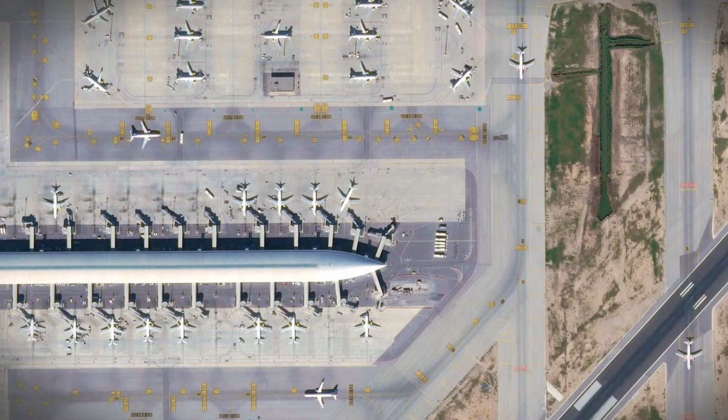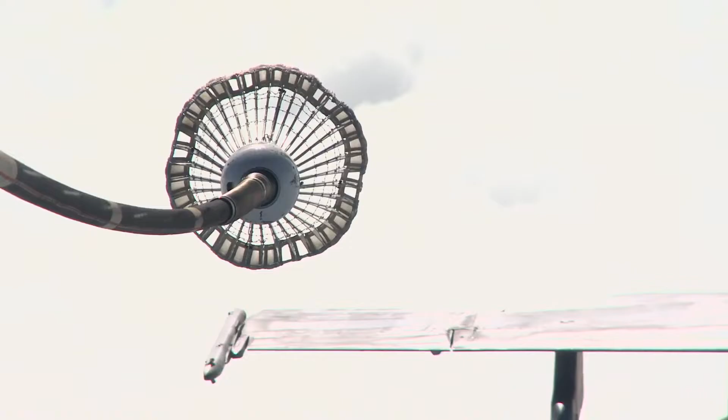The fuel mass carried by a commercial aircraft can represent about half of its total mass at takeoff. Carrying and pumping this large amount of fuel, in addition to safety regulations, requires complex systems which must ensure uninterrupted fuel flow during flight.

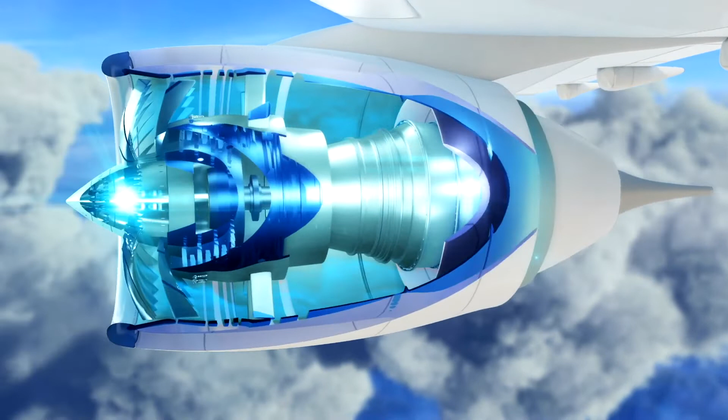Predicting the fuel system's behavior early in the development cycle enables you to optimize the key performance indicators for different attributes, such as fuel distribution and refueling, tank inerting, and coupling with vehicle dynamics.

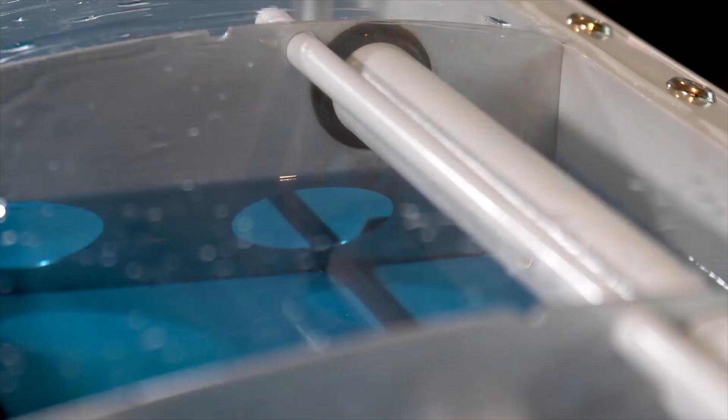This mock-up is a replica of a fuel system in an aircraft wing. It is composed of 3 tanks, separated by ribs, vents, and drain holes, as well as flap valves, and features a balance pipe and vent pipe.

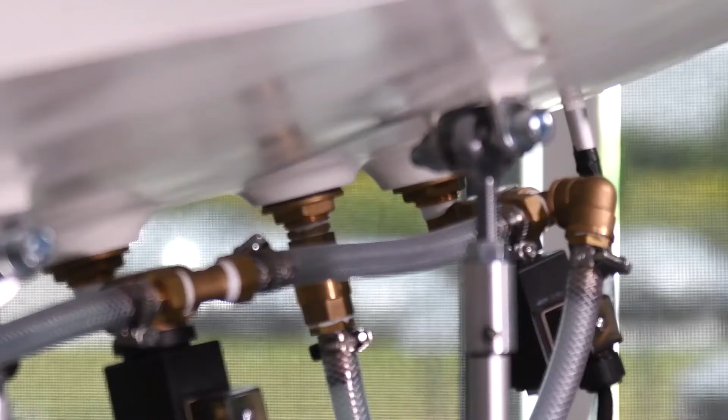To simulate the aircraft's pitch and roll, there are 2 electromechanical actuators. Finally, you find sensors which give information about the fuel rig operation, such as the liquid level in the outboard tank.

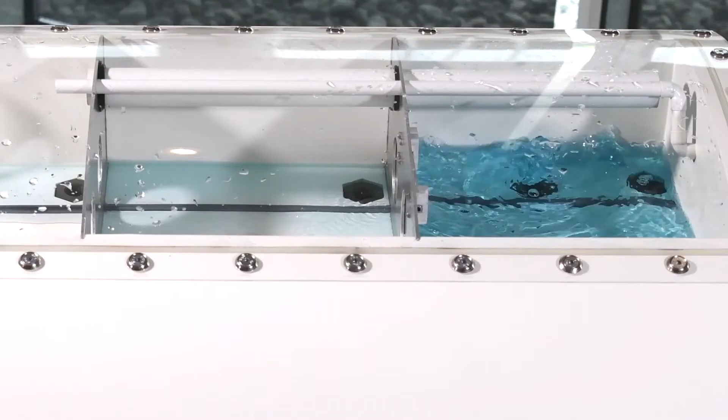This fuel rig has been made using Simcenter solutions for subsystems and component sizing, as well as architecture trade-off. With Simcenter Amesim, we run multi-domain simulations early in the development process, which allows us to validate the concept against the initial requirements. In parallel, we size the actuators so that they can cover the desired pitch and roll amplitudes.

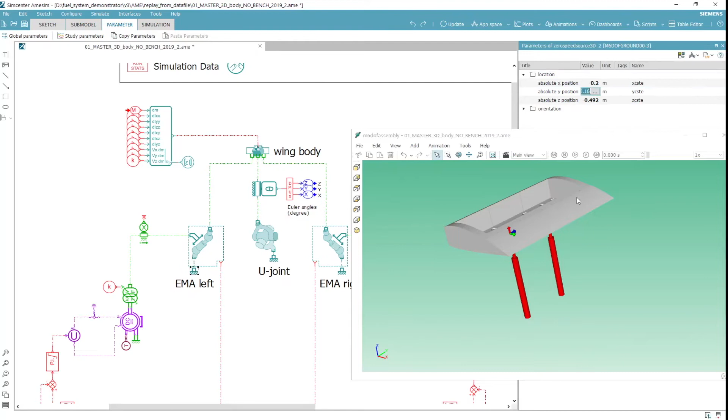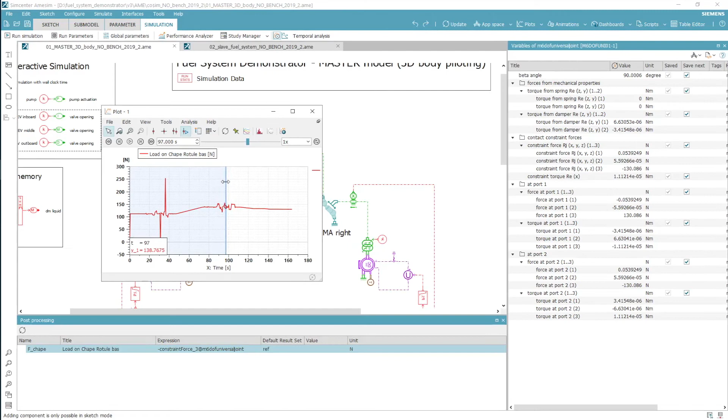Secondly, we build a complete CAD model in Simcenter NX based on the early system simulation results. When required, we can zoom in on the component level. For instance, we can apply the actuation loads extracted from Simcenter Amesim to a finite element analysis model of a mechanical part within Simcenter 3D to find the best compromise between actuation speed and structure durability.

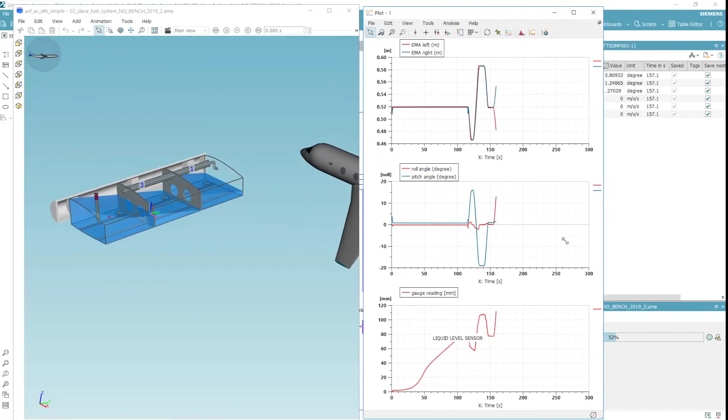In parallel, the controller is modeled and simulated, making the final integration and calibration straightforward. At the end of this process, we have a complete digital twin of the operating demonstrator in Simcenter Amesim. On the one hand, it co-simulates the mechanical parts and the actuators in 3D, and on the other, it performs all the hydraulic calculations.

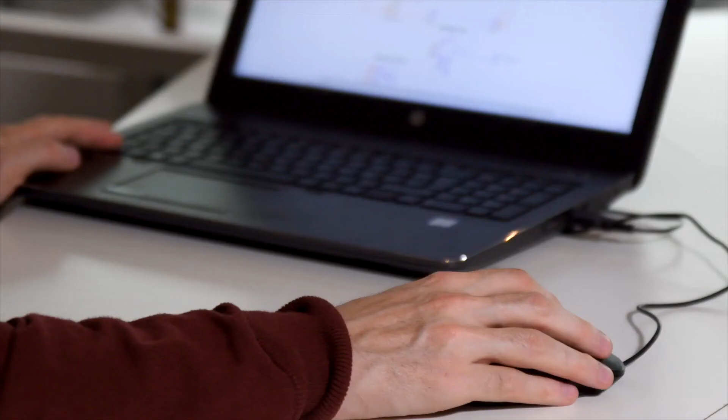The time to build this digital twin is greatly reduced thanks to the standard library of models available. A plugin automatically generates the geometrical description of the fuel tanks and ribs from the CAD model.

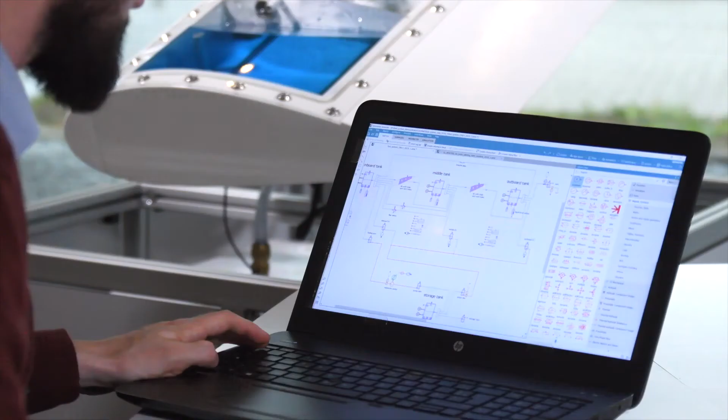From Simcenter Amesim, we can interactively operate the physical bench. Both the physical and the digital versions react to changes in attitude and valve opening and closing. The liquid level measured by a sensor is fed back to the controller and can be compared to its virtual counterpart.

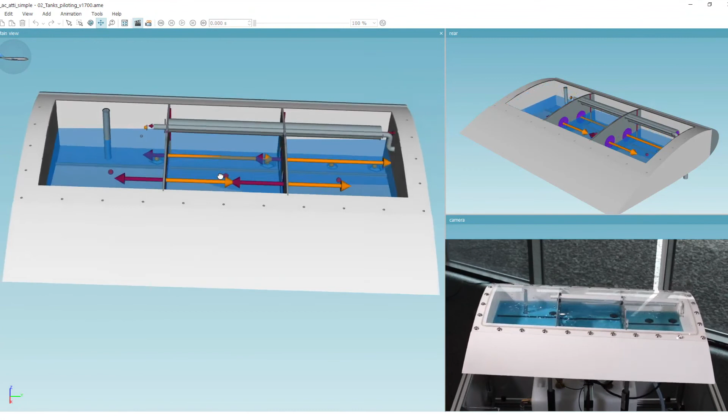The setup shows that the fuel system modeled has a good level of fidelity and is running fast enough to be operated live. In summary, using Simcenter solutions enables you to accurately predict the performance of a complete system. Virtual prototyping is a reliable, quick, and time-efficient way to analyze and predict system performance even before the aircraft wing is built.